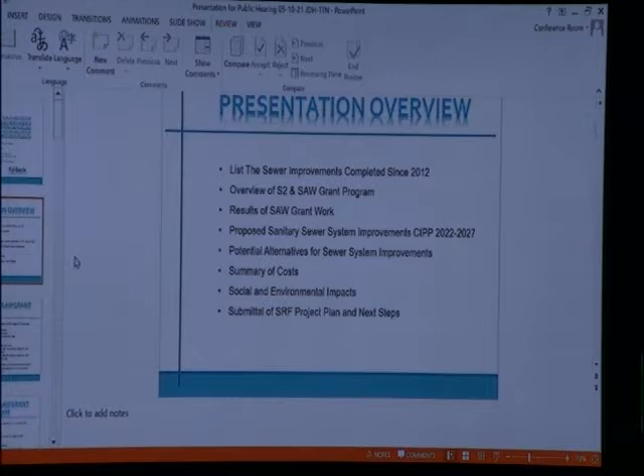So an outline of the presentation: we're going to list the sewer improvements that were completed since 2012. We'll do an overview of the S2 and SAW grant program, results of the SAW grant program, proposed sanitary sewer improvements for the CIPP 2022 to 2027 program, potential alternatives for the sewer system improvements. We'll do a summary of the costs, social and environmental benefits or impacts, as well as the submittal of the SRF project plan and the next steps associated with that. So we can go into the next.

So an overview: the city received an S2 grant in 2012 for $1 million. And as part of that grant, we cleaned and televised approximately 80,000 feet of sanitary sewer. We inspected hundreds of manholes, smoke tested the 80,000 feet of sewer, and then Fishbeck provided the flow monitoring for the sewer system.

And in 2016, the city received a SAW grant for $2 million, and 90% of the first $1 million was funded through EGLE, and then the second $1 million, 75% of that was funded through EGLE. And we submitted the final project, the SAW grant, to EGLE in December of 2019.

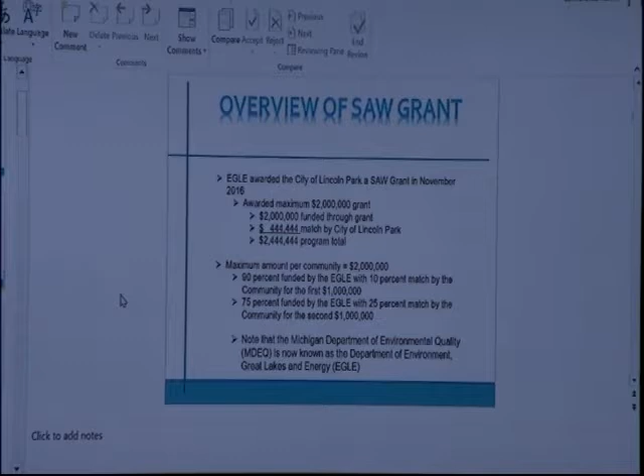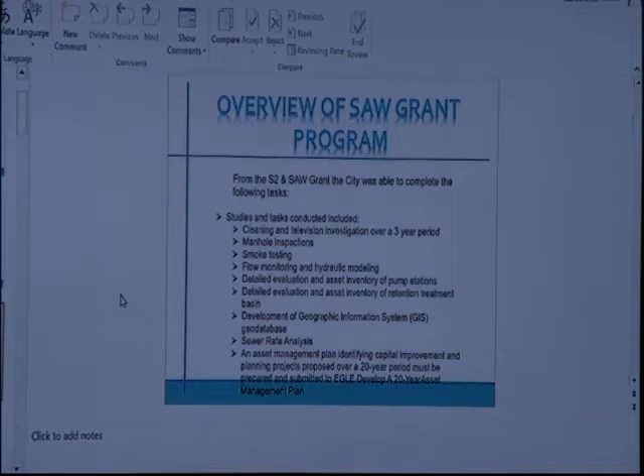So the SAW grant helped the city complete cleaning and televising of the city's sanitary sewer system. We did manhole inspections. We did smoke testing of the sanitary sewer system to identify I&I issues. And then we did flow monitoring, and from that flow monitoring, we were able to create a system model. And then we also created an asset management plan for the sanitary sewer system, the retention basin, and the pump stations. And again, that was a teamwork effort with Hennessey Engineers and Fishbeck.

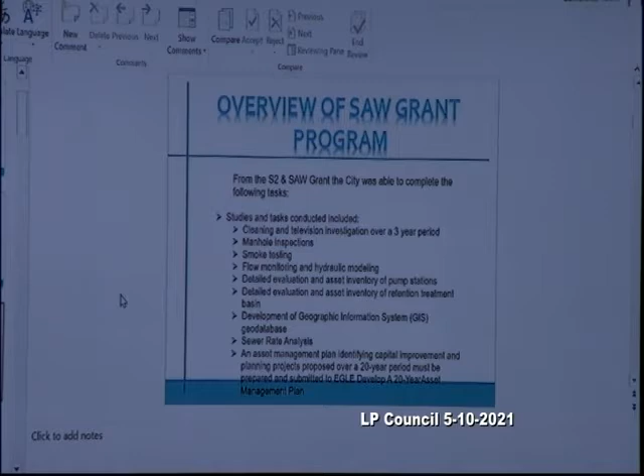We also started to create the GIS system for the sanitary sewer system. We worked with Plante Moran on establishing the rate analysis for the system. And then we developed a 20-year CIP program for the sanitary sewer system.

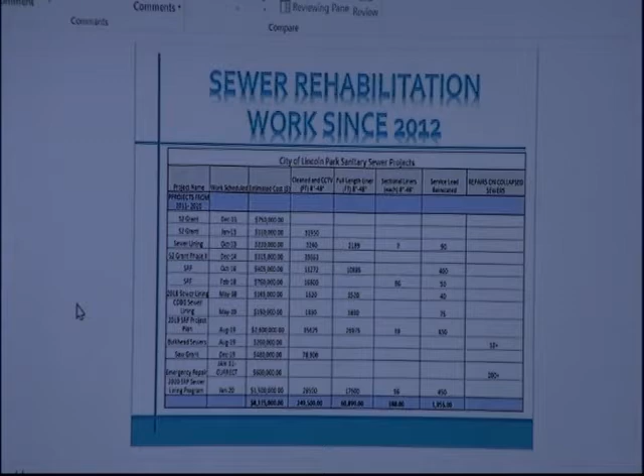On this slide, it shows you all the work that the city has performed on the sanitary sewer system since 2012. We cleaned and televised approximately 250,000 feet of sewer. We lined approximately 70,000 feet of sewer. And the total in sewer improvements that we have done since 2012 has been just a little over $8 million worth of work. The next one.

The purpose of the SAW grant, as stated earlier, is to create an asset management plan and develop and identify CIP needs for the next 20 years.

This SRF program, the program we're presenting tonight, will address the first 5 years of the program, and it will help identify sanitary sewer defects, I&I issues, capacity issues in the sewer systems, and it'll develop a better means of keeping records for the sanitary sewer system.

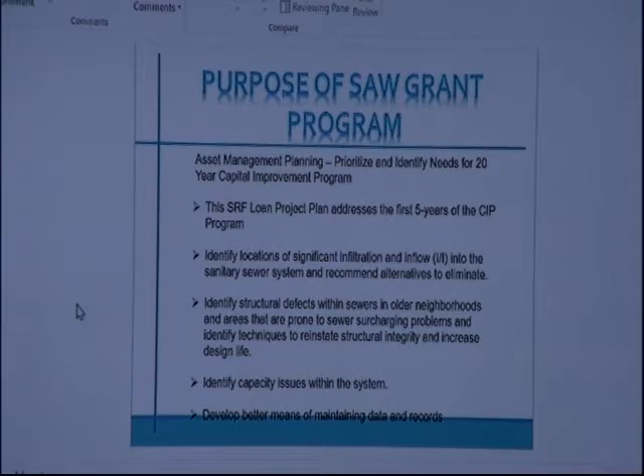The project team consists of John Kazoo, the Department of Public Service Director, and his staff. From Hennessey Engineers, it's myself, James Hollingsworth, Tiffany Newbig, Cal Hanna, and various other construction staff. From Fishbeck, we had Jeff Brown, Doug Dunn, and Caitlin Winicki. And Caitlin is the one that did the flow monitoring, and she's a water and wastewater engineer that developed a model for our system. And she did a great job on that.

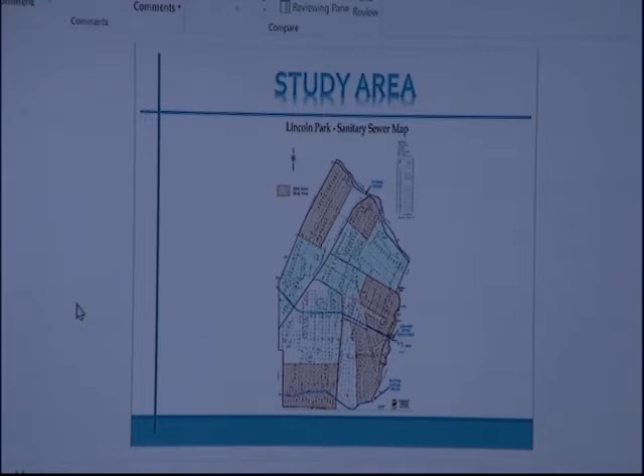This map identifies the crosshatch area in red as the work we did as part of the SAW grant, which was that $2 million grant, and the area in green was the work we did with the S2 program. So those were the two loans that are not loans, but the grants we received from EGLE in order to study our system.

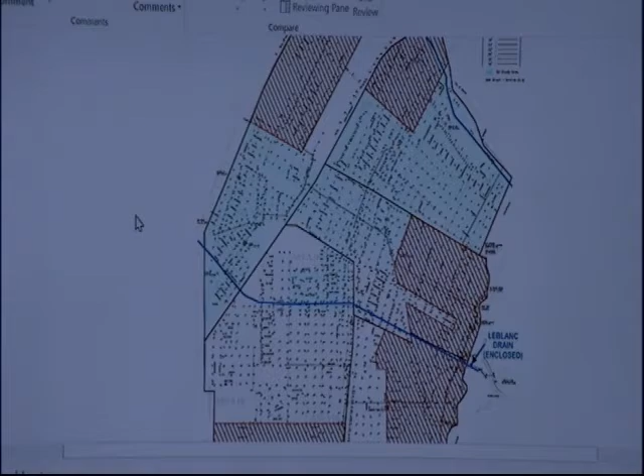So, an overview of the system. The Lincoln Park sanitary sewer system is a separated system, which means the storm sewer is a separate system from the sanitary sewer system. So the wastewater is collected in the sanitary sewer system, and it's treated at the Downriver Utility Wastewater Authority wastewater treatment plant, which is also known as DUWA. As part of the Lincoln Park system, Allen Park has 2 connections into the city system. We have 9 pump stations / lift stations. We have 4 controlled outlets into the Wayne County interceptor system.

And Lincoln Park is limited at each of the 4 locations with either a vortex valve, which limits the sewer capacity, or it's controlled by a weir. So we do have control systems that monitor how much water can be put into the sanitary sewer system at the interceptor for Wayne County at one time.

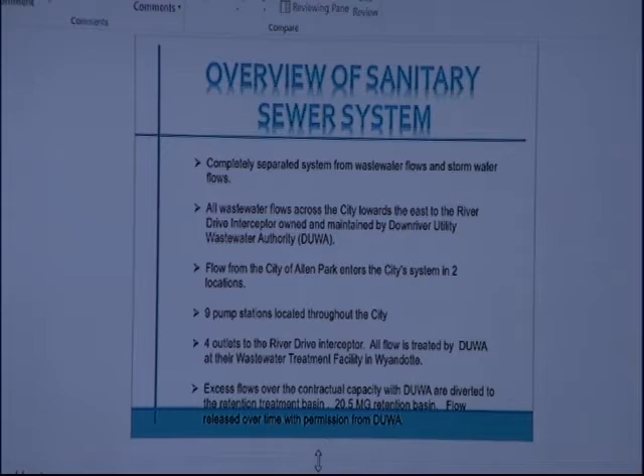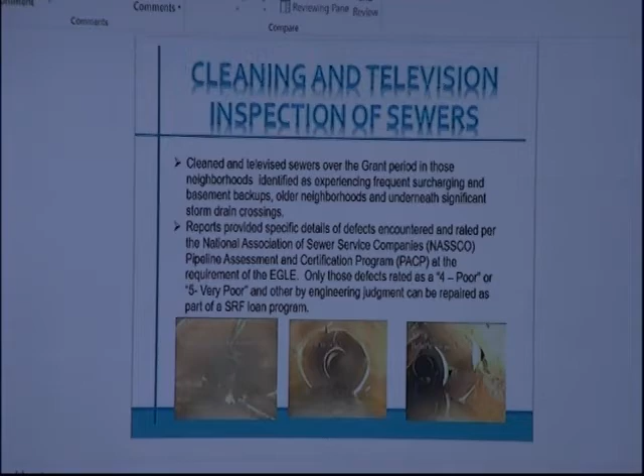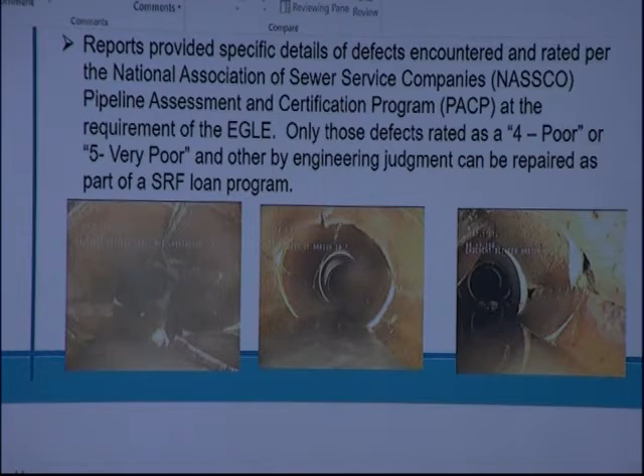So in this photo, you can see what we observe when we do the cleaning and televising of the sewer system. These are some examples of the City of Lincoln Park sewer system. And as you can see, the pipes have reached their useful life, and we have broken pipes, we have oblong pipes, the system needs some rehabilitation. So that's what this program's all about, it's a loan to help us fix these issues.

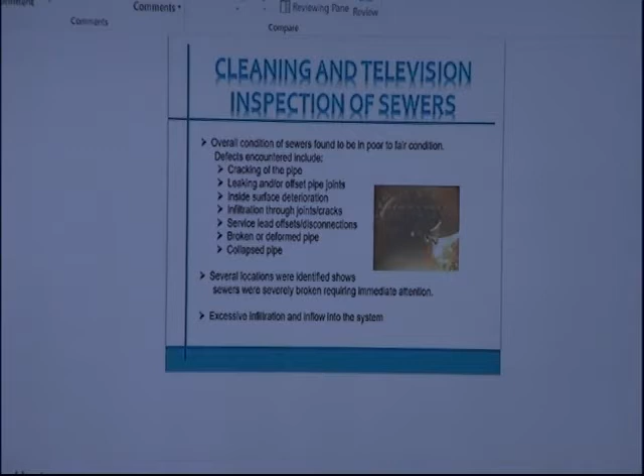The sanitary sewer cleaning and televising shows the sewer system's defects, like cracked pipes, leaking pipes. It shows where we have excess I&I. It shows where we have broken pipes as well. As part of the grant too, we did manhole inspections. So what we do is we look at the manholes, we determine areas where they might have high infiltration or inflow. And when I use the term I&I, that would be infiltration and inflow.

And infiltration is what comes in through the ground, basically. Inflow is a direct connection. Say if we had a catch basin tied into the sanitary sewer system, that gets in there really quick. So that would be an inflow. It comes in really fast. The infiltration kind of seeps in. We get a rain event, the rainwater goes to the groundwater, and then it ends up seeping into the system.

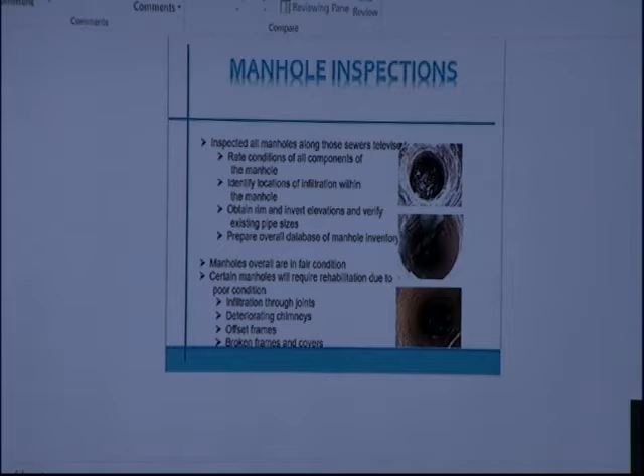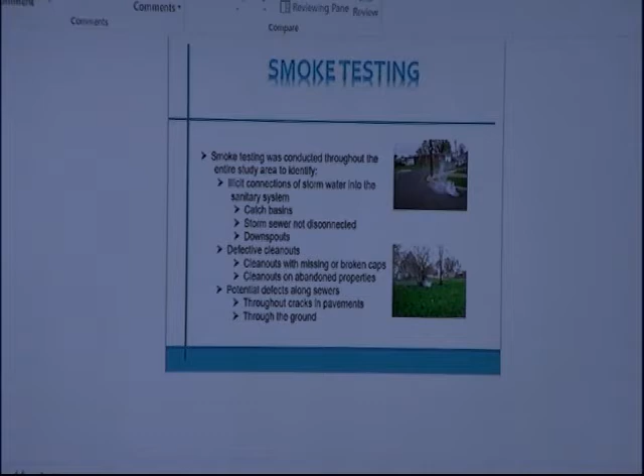So also as part of the SAW grant and S2 grant, we did smoke testing. The smoke testing helps us identify, as you can see in that upper picture, it looks like a catch basin is tied into the sanitary sewer system. So as we apply smoke into the sanitary sewer system, it finds the easiest means of exiting the system, which is catch basins, could be broken manhole covers, cleanouts that are broken, and that was part of the whole grant program to help us identify these issues so we can repair them and reduce the I&I going into the system.

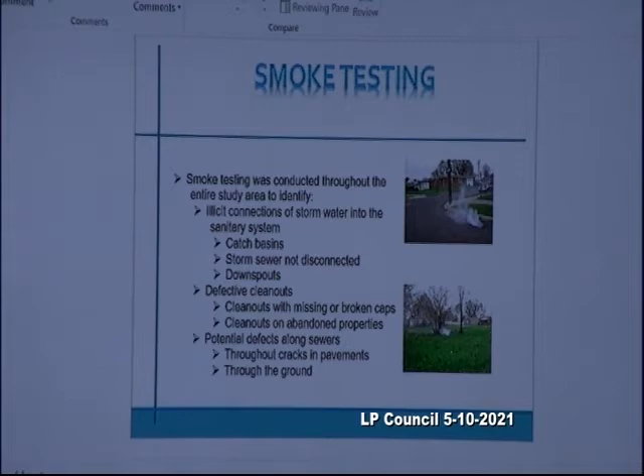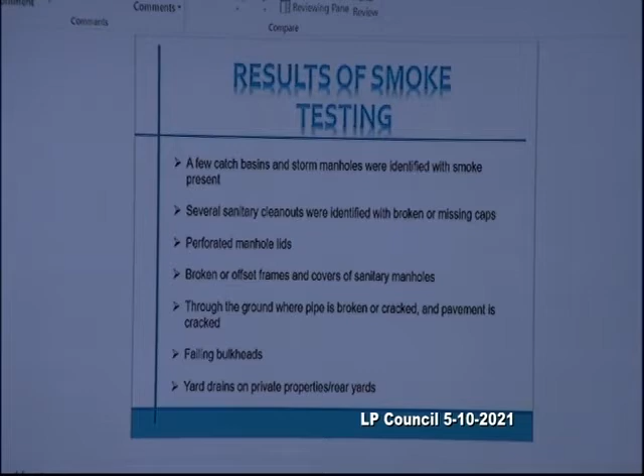As I said before, Fishbeck did the flow monitoring and the system modeling. So they put flow meters into the system at various locations that we thought were critical locations. We keep the meters in the system for a minimum of 6 months, and it'll collect data on a 15-minute interval, and we use that data, especially in the rain events, to determine areas where we're finding excess I&I, where, say in a dry weather flow, you may get 1,000 gallons coming through. You get a rain event, and all of a sudden now we have 5,000 gallons coming through. So that's what the modeling does.

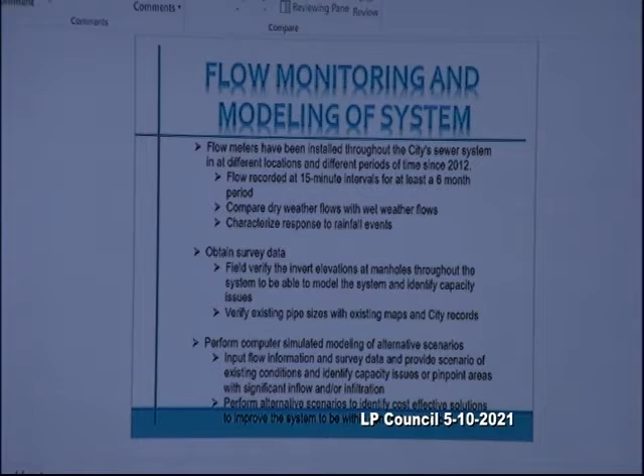And then as part of that, Hennessy collected all the survey data, so we shot the manhole rims and inverts, which created data so that Fishbeck could finish the model for us. So during rain events, we find a drastic increase in the sewer flows in the system, which again is attributed to the I&I of the system.

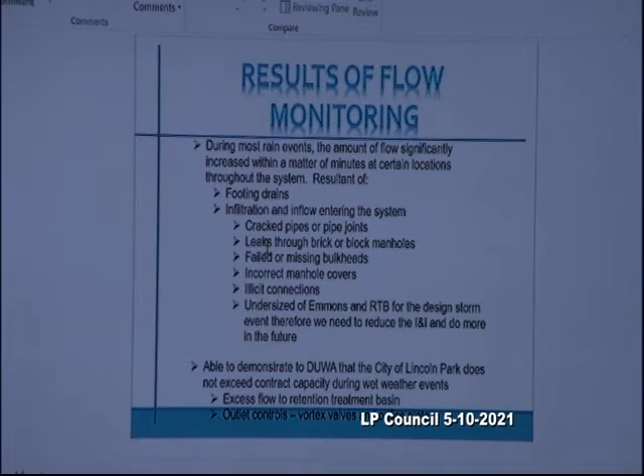From that, we identify the possible defects. We identify pipe cracks, leaks, failed or missing bulkheads in the storm sewer system, wrong manhole covers, and illicit connections where a storm sewer or a downspout might be connected into the sewer system, which attributes to excess I&I. As part of the flow monitoring, we also found that the Emmons pump station and the retention basin are undersized for the storm events that we're seeing.

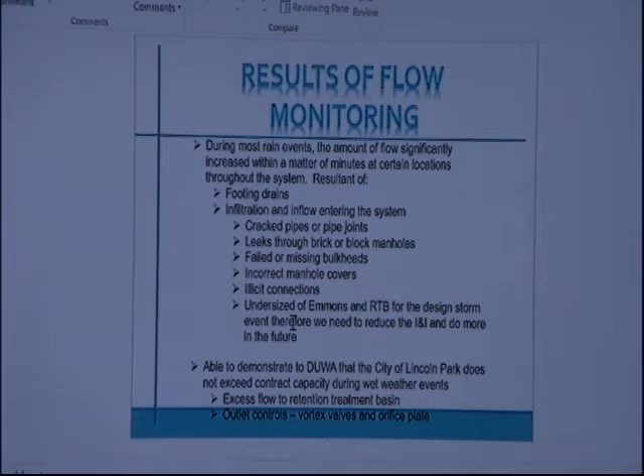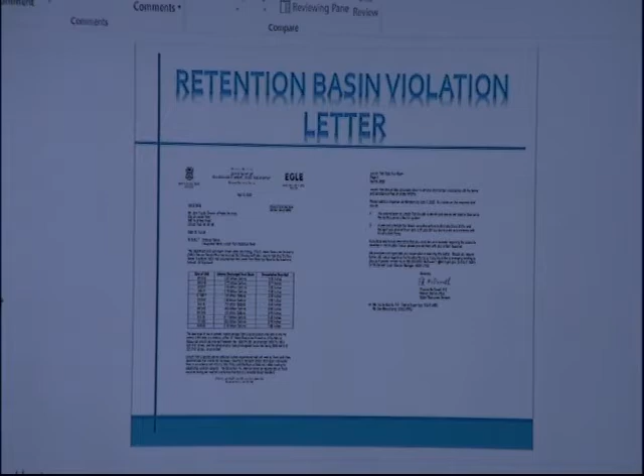So basically, the sanitary sewer flow goes into the Wayne County interceptor. When we get the rain events and the high flows, the excess flows will go into the retention basin. The retention basin is a 20.5 million gallon basin. When we get to the 20.5 million gallons, the retention basin will overflow into the Ecorse Creek.

And you can see in this table, those are some of the violations we had. Some were easily explainable, but some weren't. So basically, EGLE came back to us and said, we feel that you have excess outfalls or sanitary sewer overflows, and you need to do something to reduce that. So that's what really stemmed this SRF project.

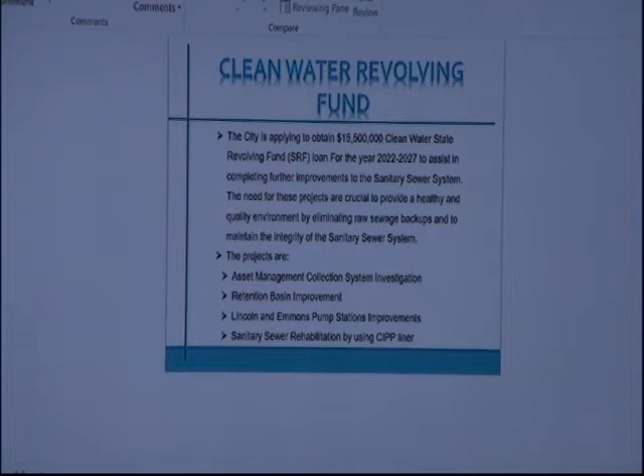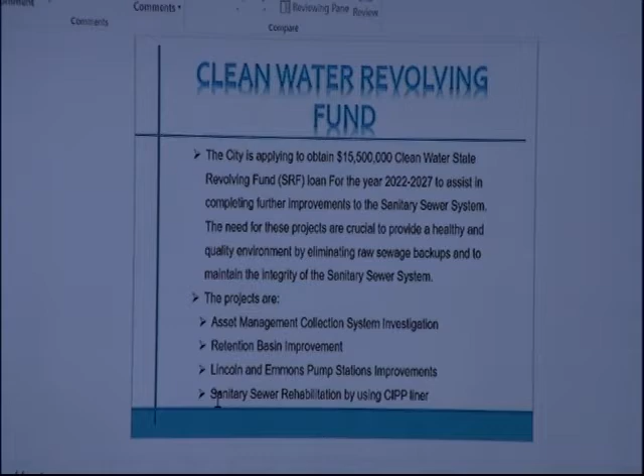So as part of the project, the SRF loan is going to be for approximately $15.5 million for improvements to the sanitary sewer system, which includes an asset management collection system, retention basin improvements, the Lincoln and Emmons pump stations will have improvements done to those as well as rehabilitation. And we'll be doing full length and sectional sewer lining as part of this program.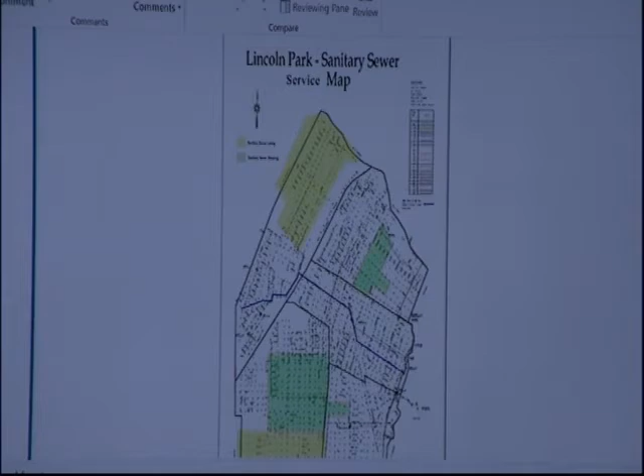The areas in this map in yellow are the areas where the sewer lining will be taking place on this project this year. So these are all areas that we've already identified through the SAW grant that have excess I&I defects and all that. So as part of the SRF loan, we'll be preparing plans and specs to line these areas in yellow. The area in green is areas that we're going to be studying as part of this SRF project plan.

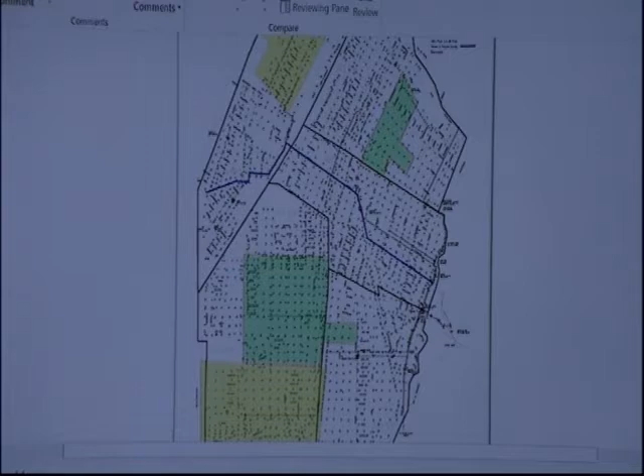So this is a map that basically shows some of the assets that the city has. It shows where the pump stations are located, where the retention basin's located, and it just helps identify important features in the sanitary sewer system.

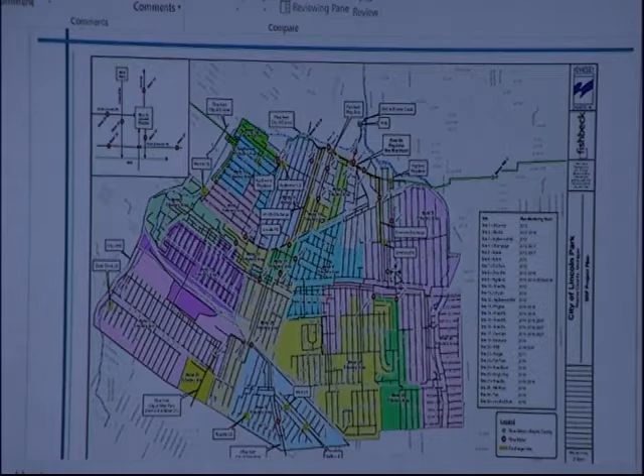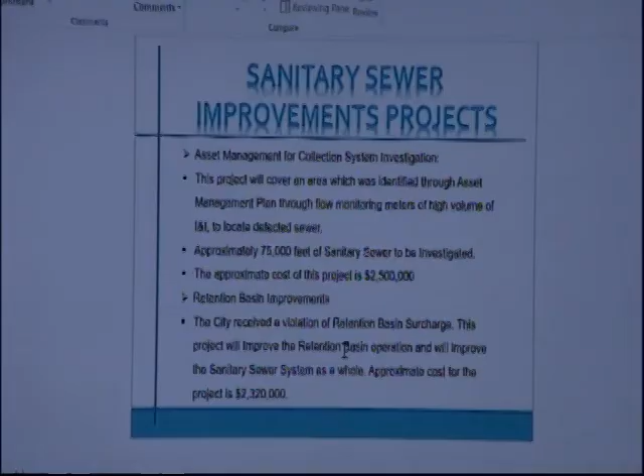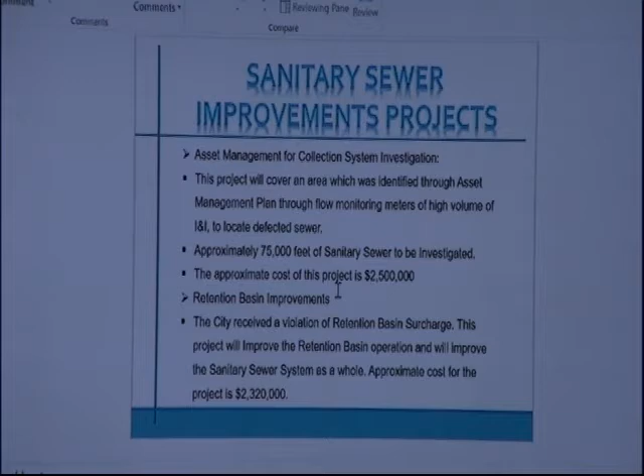So as part of the sanitary sewer improvements, we're going to create an asset management plan, and as part of that, we're going to investigate about 75,000 feet of sanitary sewer. We're going to determine areas of defects and excess I&I. The estimated cost for the study area is going to be about $2.5 million. We will also be doing work on the retention basin, and the cost of that will be approximately $2.3 million worth of work.

As I stated, Fishbeck will be working on the rehabilitation for the sanitary sewer pump stations, which will be the Lincoln and Emmons pump stations. And these pump stations are stations that we use especially during rain events. So when the system exceeds its capacity, these pump stations are what pumps the excess water into the retention basin.

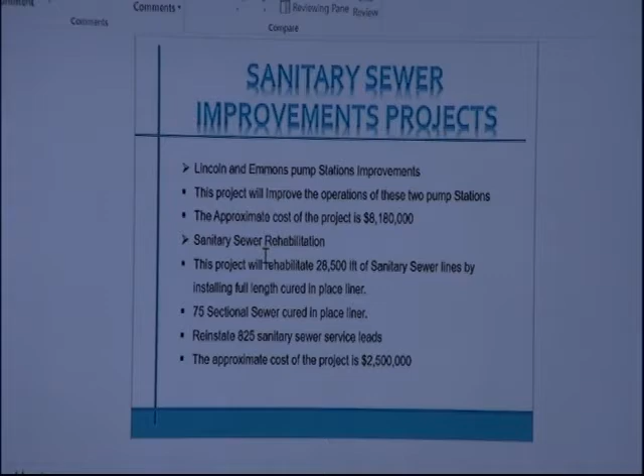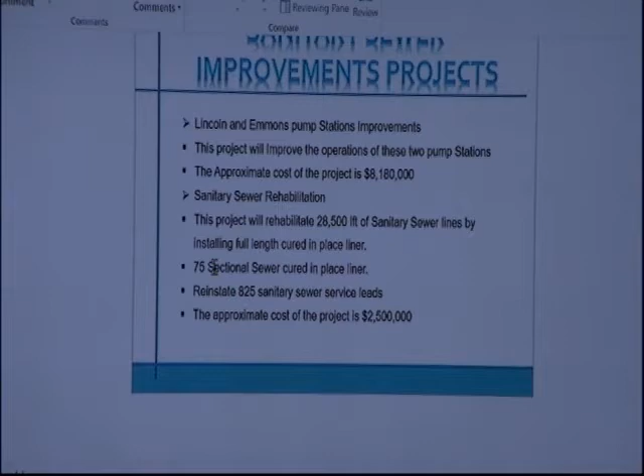So it's critical that these are updated and operate correctly, because if they do fail, that could cause potential basement flooding. So the cost of these two pump stations to be rehabbed is approximately $8.1 million. For the sewer rehabilitation, we'll be doing approximately 28,500 feet of sewer lining. We'll have approximately 75 sectional liners. We'll reinstate about 825 sewer leads at a cost of about $2.5 million.

As part of the SRF program, we have to look at alternates to show what's the most cost-effective way to handle the rehabilitation of the system. So the alternates we look at are, one would be a no option, another one would be rehabilitation of the sewer system, and a third one would be to remove all the old sewer and replace it.

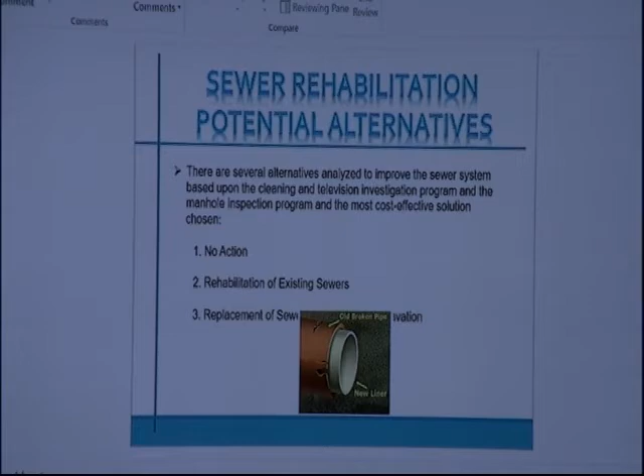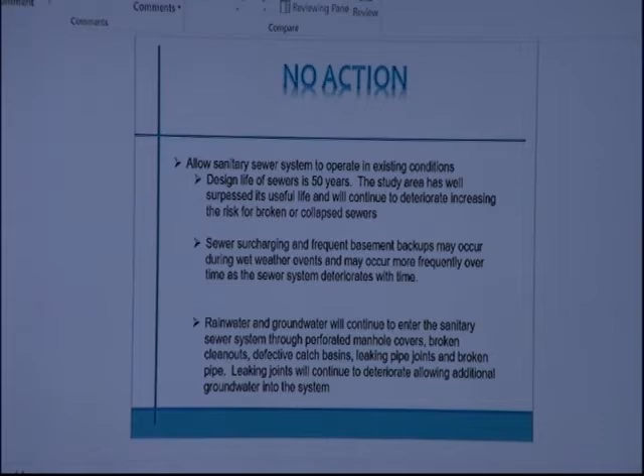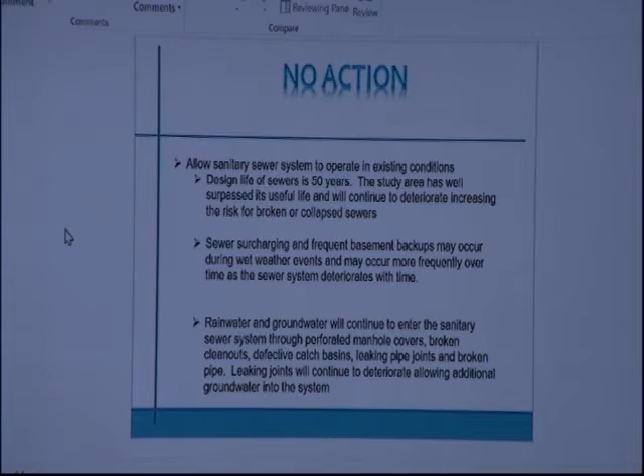So once we put that in there, it's like a brand new sewer. It'll have probably a life expectancy of 50 years. So again, as we talk about the alternatives, the no action is really not an option, but we have to state that as part of the SRF plan. Because no option obviously means we're not going to fix the sewers that are defective, we're not going to eliminate the I&I, and the I&I is what contributes to basement flooding and the rest. So no option is not really a way to go.

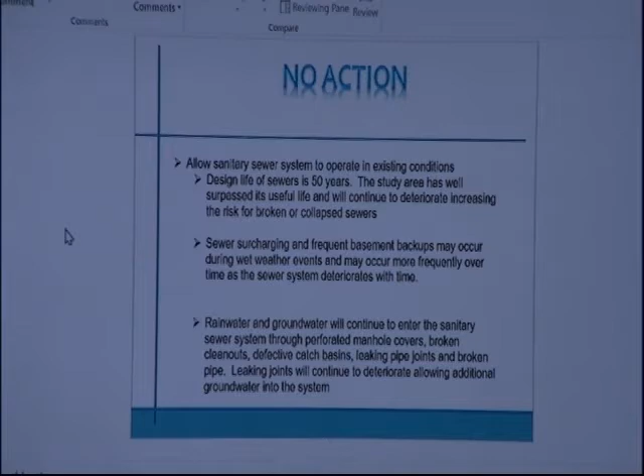So one of the options we looked at was the rehabilitation process, which is the most economical process. It helps eliminate the excess flows. We repair all the sewer defects and bring the sewer up to a brand new sewer. It extends the life expectancy of the sewer. The rehabilitation system is a less disruptive and cost-effective way of doing the project. If you look at rehabilitation, we'll spend approximately $2.5 million in the rehabilitation part of it, versus about $11 million if we had to remove and replace all the sewers, not to mention all the disruption that causes in people's yards.

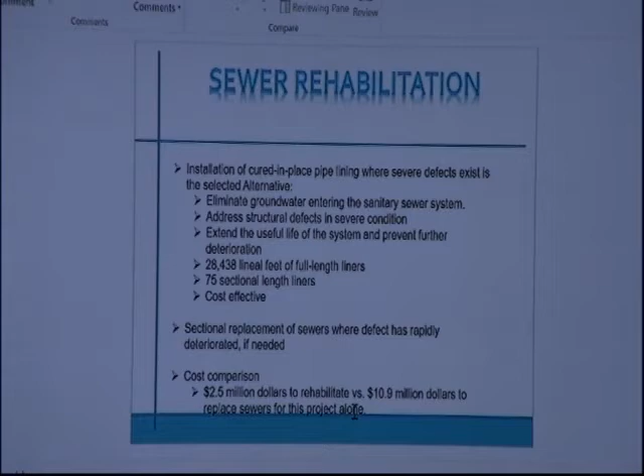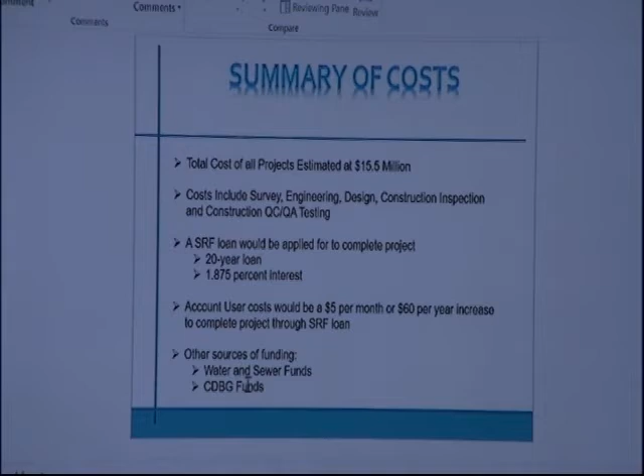As part of the sewer project, the SRF loan, the total cost of the loan is going to be approximately $15.5 million. The cost is going to include design and construction, management costs. The SRF loan is a low-interest loan. Right now, the loan is approximately 1.875%, which is very low. The average cost for the average homeowner is about $5 per month, or about $60 a year. And other sources of funding for this project will be water and sewer funds, and we've used CDBG funds on the sewers as well.

At this time, I'm going to have Doug Dunn from Fishbeck discuss some of the rehabilitation work we're going to do to the sanitary sewer pump stations, the Emmons and the Lincoln pump station. If you want to take it away, Doug? Sure. Can everyone hear me? Yes. All right. Okay.

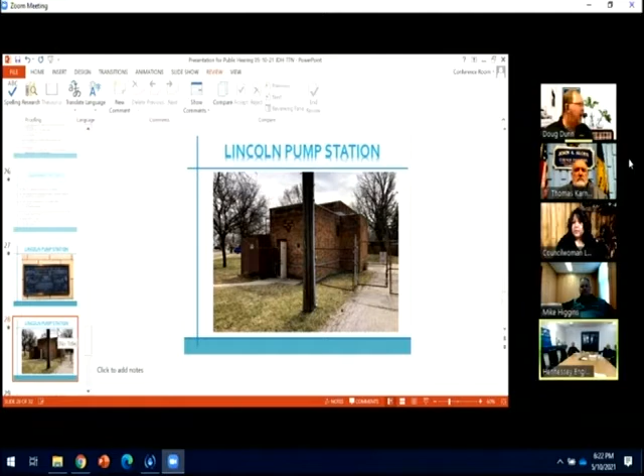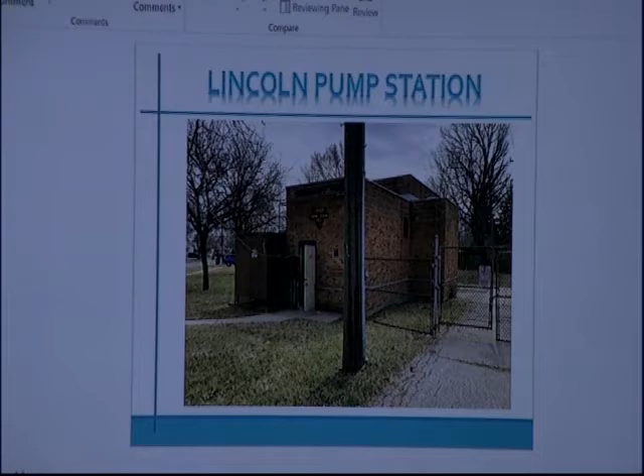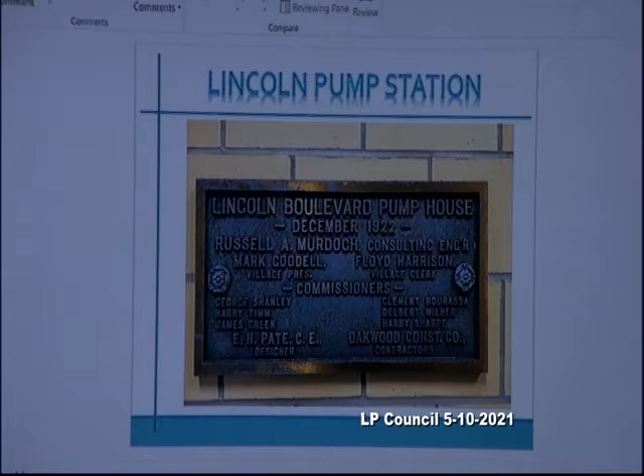Thank you. Hi, I'm Doug Dunn with Fishbeck, Senior Water Wastewater Engineer. And as Jim mentioned, Fishbeck's been working with Hennessy and the city for a very long time on this. And our sewer crew put meters in the system and actually monitored the real-life conditions that are occurring in the sewers as the rain events happen. And that information went back into a computer model. And from that data, they were able to determine that the pumps at these two stations are not producing the volume that they're intended to be producing.

Jim had the plaque up there on the first slide. And the Lincoln pump station, as it sits today, this plaque says 1922. That was the original station that was there, and what you see today was added onto that station in 1953. And the similar situation exists at the Emmons pump station. A small original station was built, and then in 1955 it was expanded upon.

Well, I went out as part of the asset management work, and I visited all 9 of your pump stations, particularly looking at these 2, did a little research with the pump manufacturers, and was able to determine that the pumps that are in place today are the original pumps that were installed in the 1950s. So they're very inefficient, very old pumps, and it does make a lot of sense that they're not producing the amount of flow that they should. So we looked into it, and as Jim had mentioned, the program requires looking at 3 alternatives.

So the first alternative that we looked at for both stations was to build brand new pump stations at a different location. And as you know, Lincoln Park is pretty much built out. So the nearest location, there's a public park nearby both stations. So we looked at building new pump stations in those parks, which would require extending sewers from the existing pump stations to those new locations and then demolishing the existing pump stations. And that priced out at $11 million for Emmons and $14 million for Lincoln Pump Station. So significantly more than what we are looking at for the renovation work.

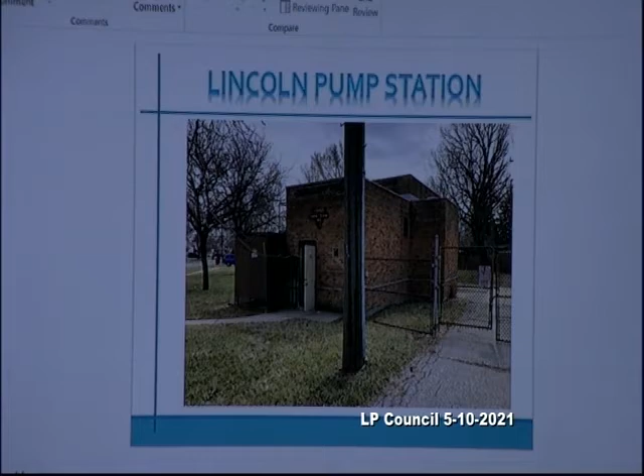There'll be minor tuck pointing on the outside of the building because for the most part those buildings are intact and in good shape. But basically we're giving it an operational upgrade and setting it up so that all the flows can get down to the basin. Jim, back to you. Thank you.

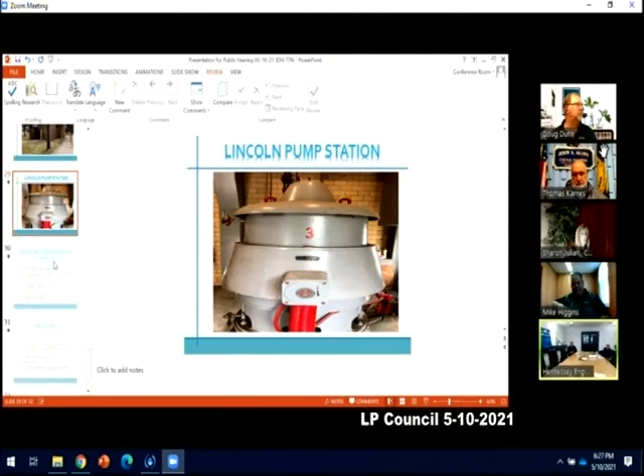So, again, for the SRF part of the project plan, we have to look at social and environmental impacts that the projects will have on the city. And some of the positive impacts are obviously if we reduce the I&I in the system, we're going to reduce basement backups. We'll reduce sewer surcharging. We'll reduce I&I coming into the system. We'll extend the useful life of the sanitary sewer systems.

And some of the negative impacts you would see, like with any construction, you're going to have noise. You'll have possible temporary lane closures during some of the sewer lining projects. We'll have temporary loss of sewer services, just while they're lining it. We've gone through this already. We've lined thousands and thousands of feet. I forget what I said earlier in the presentation, but this has already been going on in the city, so we're pretty well used to having the sewer lining projects. And then general construction and dust are also always environmental impacts during construction.

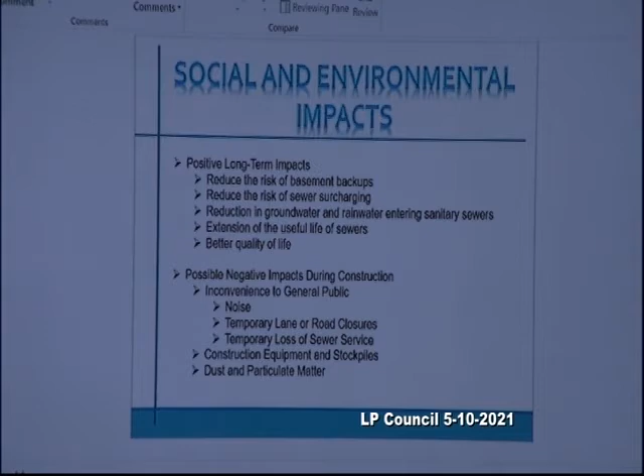And then the next steps for the sanitary sewer project plan will be the city will have to pass a resolution at the May 17th meeting adopting the project plan. And then we will submit that to EGLE. The project plan is due by June 1st to EGLE in order to meet the sewer loan deadlines. And then from there, EGLE gets all the projects that are submitted. They'll rate each of the projects as a priority. Lincoln Park's going to be a high priority because we've already been issued a notice of violation from EGLE.

And as we know from the initial project plans that were submitted, or the letter of intent, I guess you would say, to do a project, we know that there's more money in the sanitary sewer SRF program than there are projects that have been submitted. So there's no doubt in my mind that Lincoln Park will get the SRF loan and will be able to move forward. We'll know probably in August or September of this year if we have the loan.

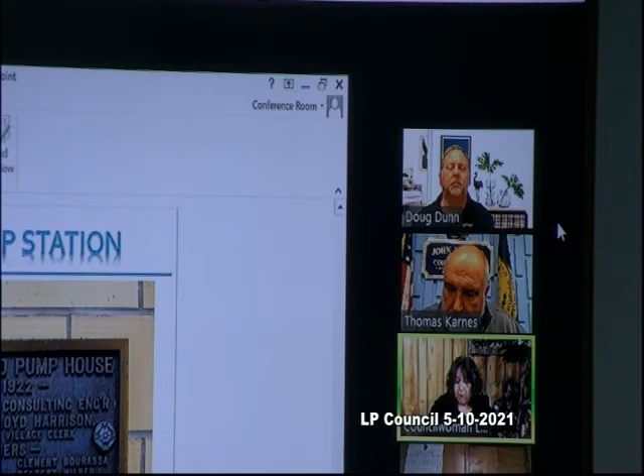Okay. Could you also explain when you said that we would have temporary loss of sewer services? What exactly does that mean to me? It actually has probably no impact to you for the most part. When we put a sewer lining in, we hand out notices to all the residents. They line the sewer, and it's like a big sock that goes inside of the sewer. Then they treat it with water, they heat it up, and then the resins in the material harden to a hardened plastic.

So depending on what process we use, it takes probably 6 to 8 hours for it to harden. During that 6 to 8 hours, we ask the residents, do not flush the toilets, do not use water, because until the pipe's cured, we can't open the services back up. Once the pipe's cured, they send a robot in there.

So before they do it, like I said, we'll videotape the sewers, so we'll find out exactly where all the residents' sewer leads are. And then they'll send a robot in, and that robot will cut out sections of the pipe wherever the people have their sewer connections, and that opens it back up, and then the sewer flows back normally. Okay, thank you. You're welcome.

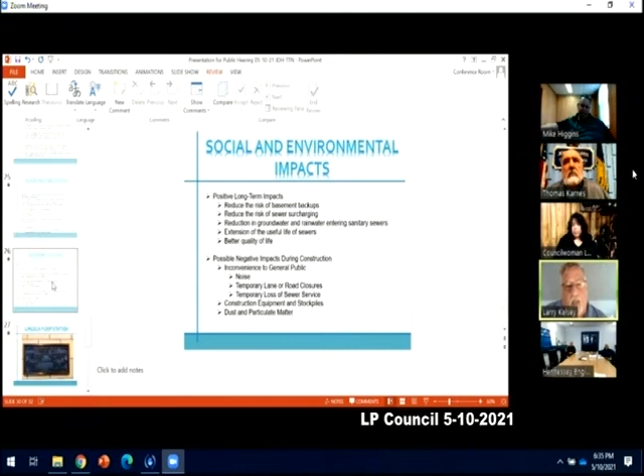Any other comments from council? Yeah, through the chair, if I may, Your Honor. Yes, go ahead. The cost factor, I think you batted around a couple cost figures, Jim. One was that for the 15.5 million, it probably would cost the resident about $5 a month, $60 a year. Is that including when we raise the sewer fee and the sanitary fee or not? Does anybody know how that's going to be paid for?

This part of it is what we'll be working with Plante Moran on. So we did the 20-year capital improvement plan. Plante Moran looked at the sewer system part of it, and then they created a rate structure. So part of this is already included in that rate structure. So when Plante Moran gave their recommended increases in sewer fees, this is already included in it? That is correct. So this will not be above and beyond what you saw in the Plante Moran report.

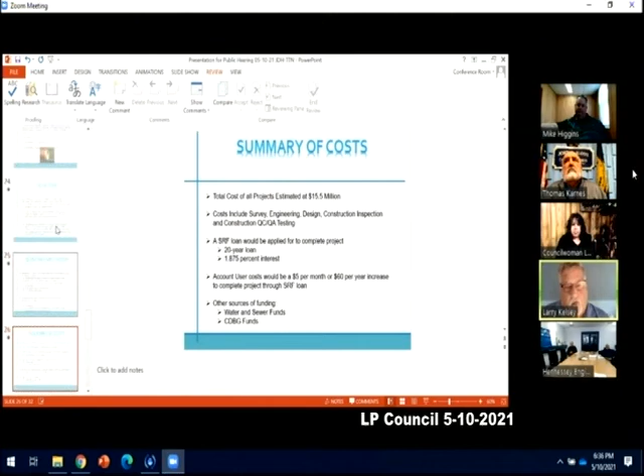Okay, so the Plante Moran report suggesting the cost increase to the sewer and the water fund would take care of this particular project. That is correct. Next question I got is for the retention basin. We talked about it not being able to handle all the capacity because of the overflows. And then you talked about the vortex valves and the weir valves and sensors that were put in to the system, and we talked about this at the DPS meeting. Have we got enough information to go back to DUA to indicate what the actual over discharge going through Lincoln Park is, based upon what the company's been collecting?

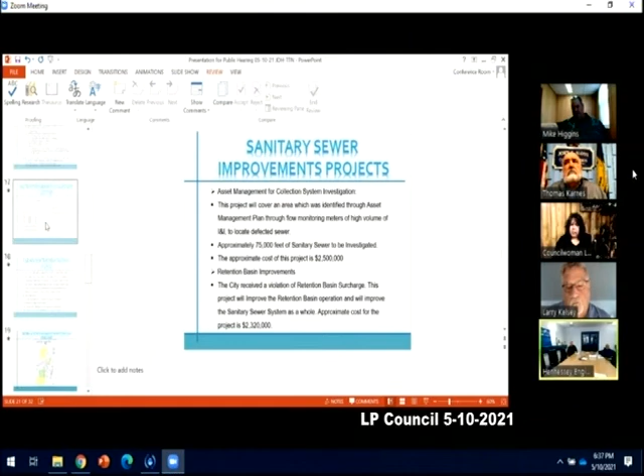Yes, as a matter of fact, and John may know the time frame a little better than I do, I would say about a year and a half ago, what was happening is, in the past, when DUA was operated by Wayne County, they kept telling us that it was our issue, we're surcharging the sewer system and the interceptor. And what Fishbeck was able to do with their flow monitoring was show them that no, that is not the case, we're not the cause of the surcharge of the sanitary sewer system. Our vortex valves are working properly.

Our control weir is working properly. So we are not putting excess flows during a rain event into the interceptor. What we do though is we put them in the retention basin, and when the rain event stops and the interceptor is not surcharged, we're allowed to put the water from the retention basin back into the interceptor. I'm not saying we don't exceed our capacity ultimately to the plant. What we're saying is we're not the cause of the surcharge of the system. We're putting our flows in at a later date.

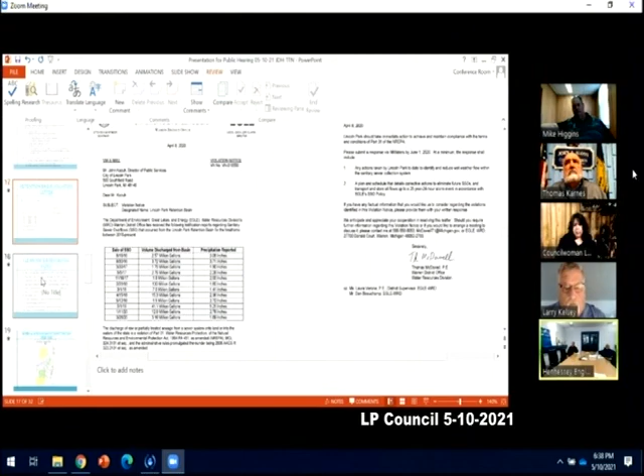Okay, because there was a cost factor around the bill that we get from DUWA that charges us a massive amount of overflow dollars. That's what I was asking. I know we had gone through this investigative process, and I think it has not been resolved yet, but that's a big part of this puzzle because we're spending all this money, and part of it was to put those sensors in to figure out where the excess flow is going. So that's what I was asking. Yes. Okay, that's all I got, Your Honor.

Thank you. All right, sir. Anyone else have comments, questions? Mayor, if I could ask a question of Fishbeck, Mr. Dunn, John? For both of the pump stations, Emmons and Lincoln, is there anything included on updating or removing those fuel tanks that are starting to become problematic because of age?

Currently, yes, the intention is to remove those underground storage tanks. I know Jim forwarded a question to us from EGLE, where EGLE is questioning the need for that work to be included in the project. The response that I gave to Jim was that both stations are equipped with standby generators, which require diesel fuel to operate, and the generators must be functional, and that the state of Michigan has notified the city of Lincoln Park that action must be taken regarding the underground storage tanks. Therefore, the work has been included in the project, and it is necessary to be part of the project.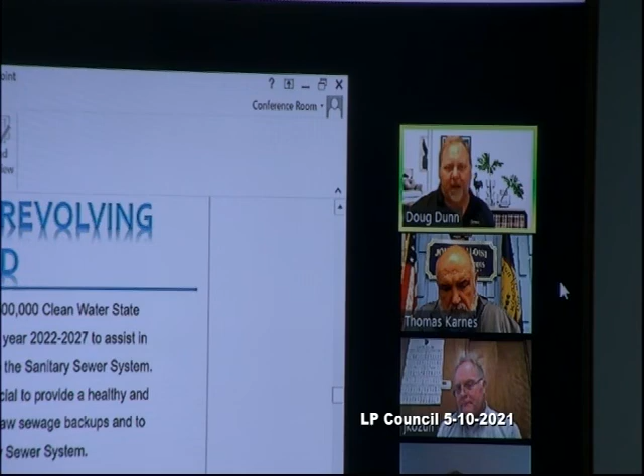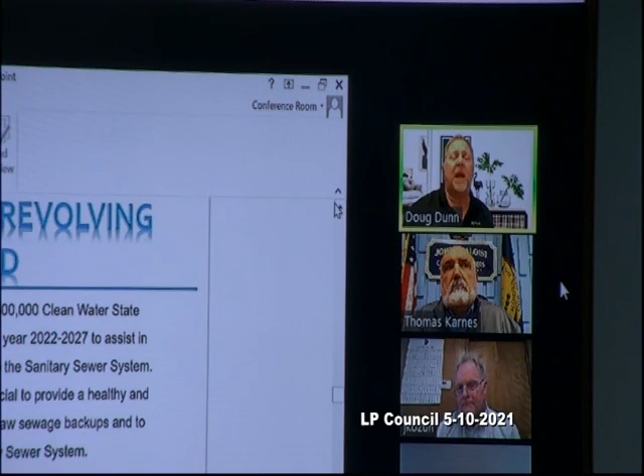I just gave that answer to Jim earlier. I think it was Friday I sent that to him, so I don't know if he has sent that on to Eagle yet or not. Thank you. Just to respond to that real quick, not yet, because what I wanted to do is have this public meeting, and then anything else that we might need to address with Eagle, I wanted to address all in one correspondence. So that will be addressed, yes. Thank you, Doug. You're welcome.

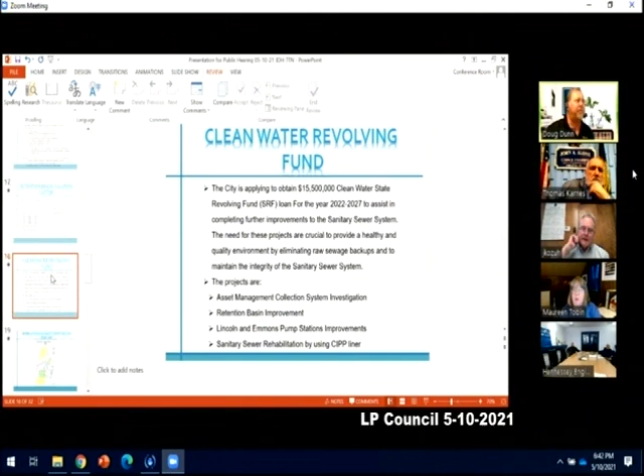Okay, is there anything else from council? I'm not hearing anything, so we'll open it up for public comments. I had a comment, sir. I was muted. I'm just curious, if we do rebuild the pump stations, is that cost already figured into this program, or is that cost above what we're doing? It's included. The cost for the work that's proposed at the pump stations is included. Jim mentioned $8 million approximately, which is $4 million plus for each station. Okay. Thank you.

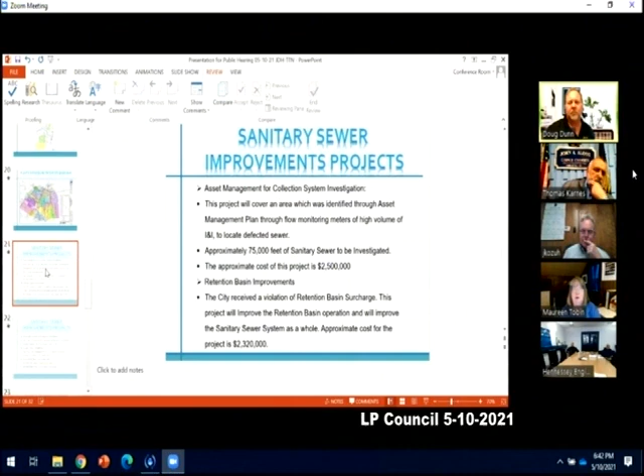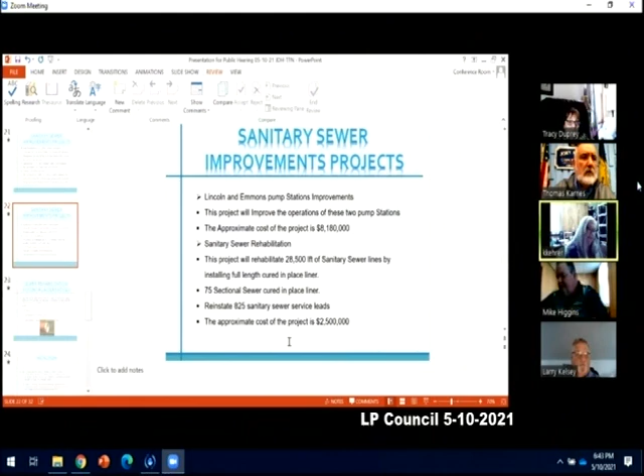All right then. Anything further from council? Then we'll go into public comments. James, do we have any citizens on the call? I do not see any. All right, then we will adjourn the public hearing at, looks like 6:42, and then we'll entertain a motion to adjourn. So moved. Okay, clerk call the roll. Alderperson Salcido, yes. Duprey, yes. Higgins, yes. Kelsey, yes. Ross, yes. Tobin, yes. And Mayor Karnes.